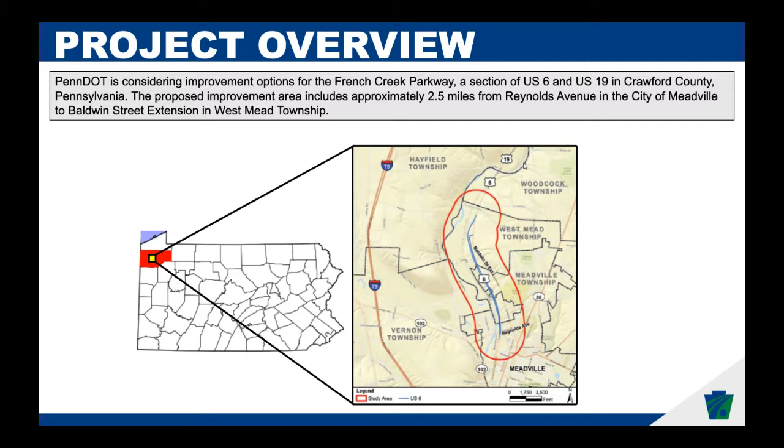Project overview. Most of you are probably familiar with this section of Route 6. It's just north of Meadville. It's where the 4 lanes are. It goes through Meadville and West Mead Township from Reynolds Avenue up to Baldwin Extension. Next slide.

We've had a previous public meeting on this when there was a planning study that was done. These are the concepts that were discussed during that public meeting in 2018: 4-lane reconstruction, reconstruct 2 lanes, and then also concept 3, 2 lanes with a trail, and concept 4 is through lanes with the service road.

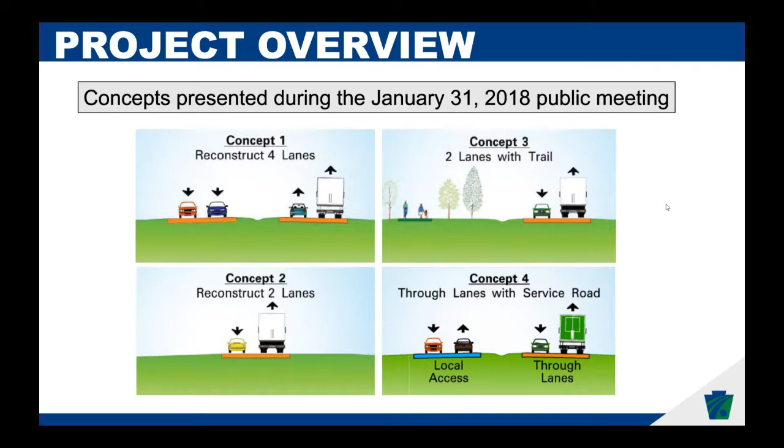It was also mentioned in the previous public meeting about the possibility of doing roundabouts at the two at-grade intersections. There are some additional considerations that have us not looking at roundabouts at this point for those intersections.

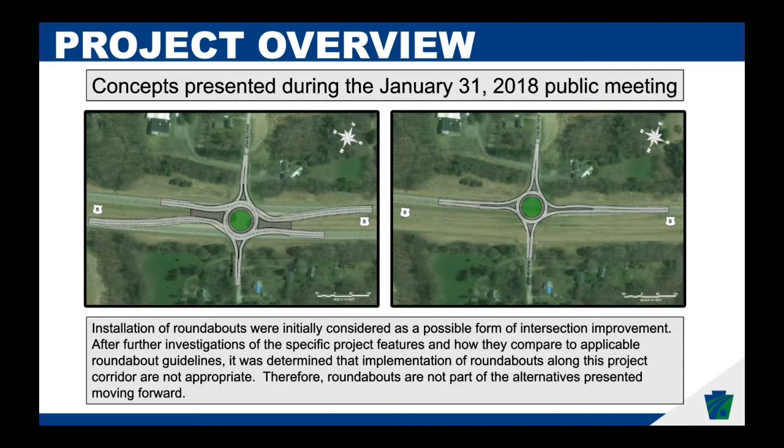Project purpose. Any of you that have driven this section of road are probably familiar with the fact that we are reaching the end of the useful life for this roadway. The pavement has deteriorated. There's some roadway geometry here as well that isn't up to our current standards. We do things a little bit differently now.

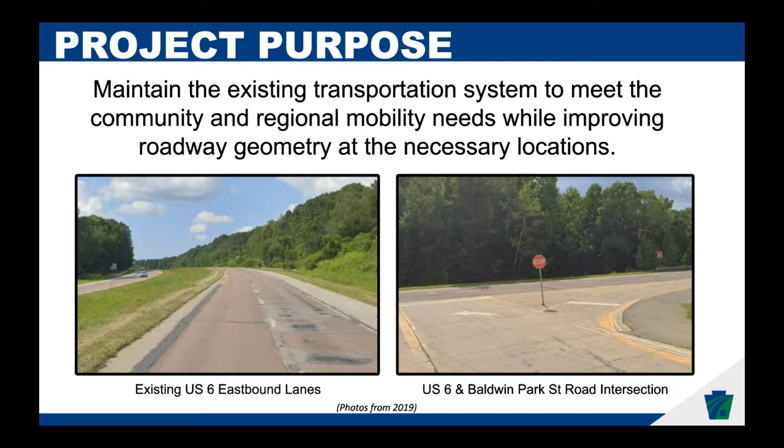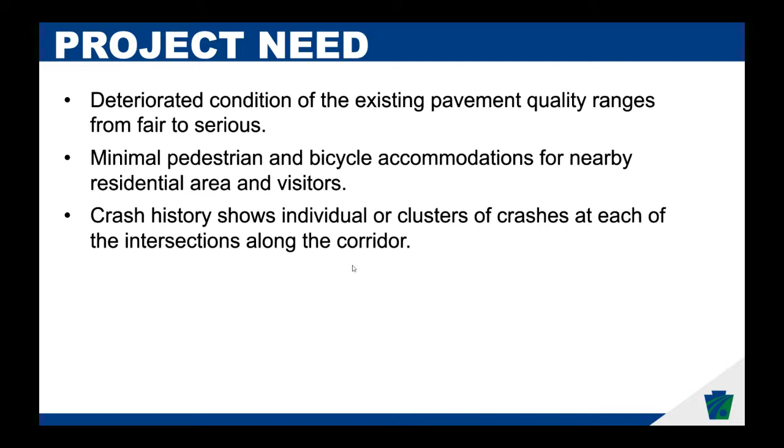This just summarizes: we've got deteriorated conditions of existing pavement, ranging from fair to serious, which we'll go over in a following slide. There's really not much pedestrian and bicycle accommodation through this section. And the crash history through here shows individuals and clusters of crashes at the intersections along the corridor.

All right, this slide goes over the corridor characteristics. There's a lot of information on here. On the top right, you've got the average traffic for each section of the roadway. Just below that, it goes through level of service. Level of service is a little bit like grades you got in school with A, B, C, D, and E, but it's not exactly like that.

Levels of service C, B, and D are really conducive to best use of that roadway. When you have a level of service A, it's great—you've got plenty of roadway. If you see where the cars are, you've got 2 cars and all that extra road, so you actually have more road than you need. It's not a great use of taxpayer dollars to be at level A. Right now we are level A through this corridor, so we have more roadway than we are utilizing with the traffic levels that we have. Our daily traffic through there is 5,700 vehicles, with a truck percentage of 6.3.

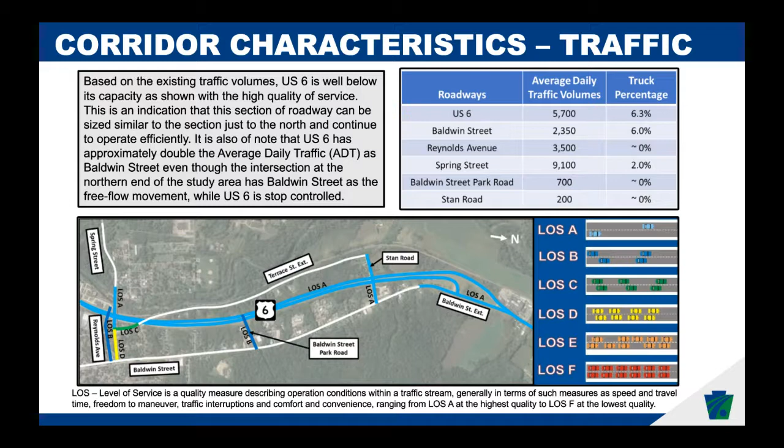All right, this slide shows us what the pavement condition is like, with red being severe or serious condition, up through green being good. So you can see most of the pavement through this area is in serious, poor, or very poor condition, with some areas of fair.

One of the things you need to consider is that a lot of times you can go through and fix areas with a simple repavement. But once the concrete pavement distress levels get higher than 2 to 5%, that really isn't something you can just pave over. At that point, you need a lot of work to get that pavement back, so replacement is a more cost-effective option.

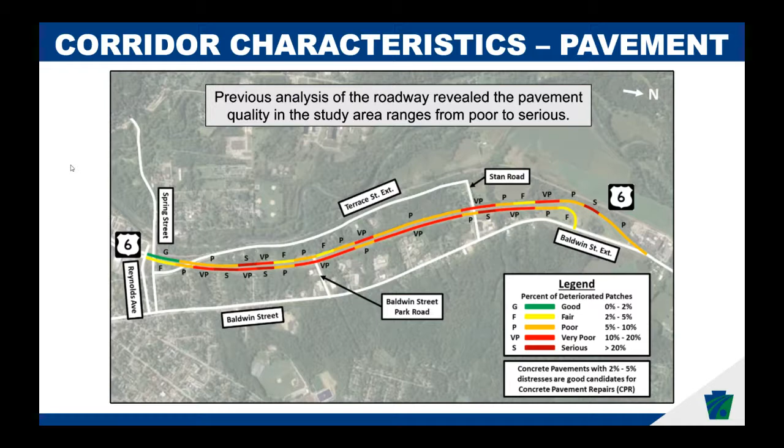There are some structures through there. We've got the Spring Street Bridge, which is our other presentation today, a box culvert that goes underneath Route 6, and also an overpass—Terrace Street goes over Route 6. Both the box culvert and Terrace Street are in fairly good condition, so we're not looking at replacement of them right now. Spring Street, though, only has a remaining lifespan of 8 years, so that's why that project is also being discussed today.

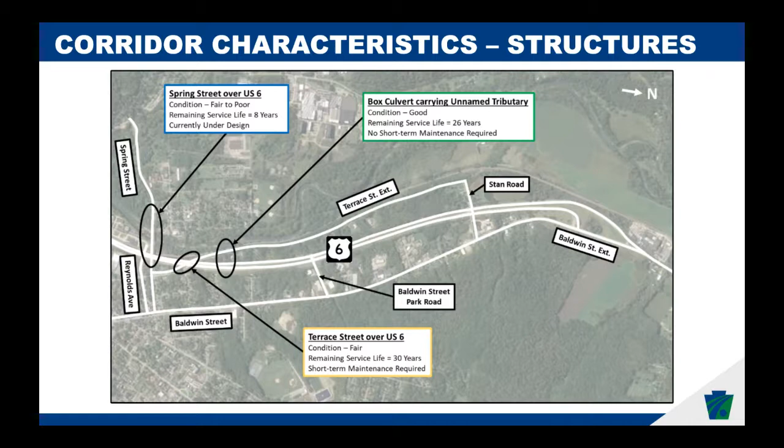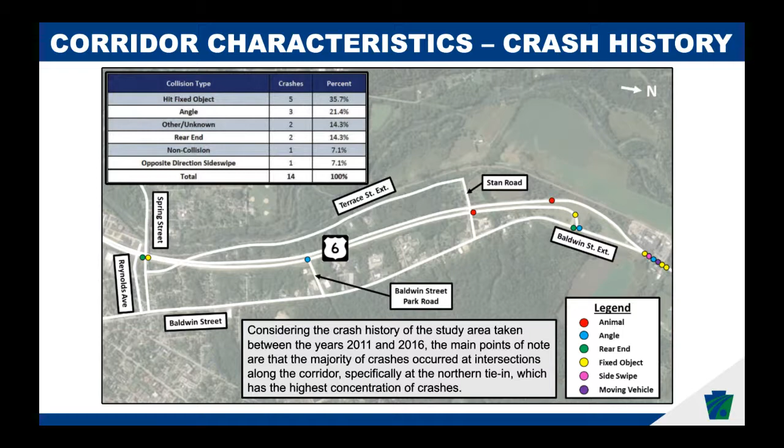All right, proposed alternatives. We've got three potential alternatives to discuss with you today. The first is to replace all 4 lanes, eliminating the wide median at the at-grade intersections. Alternative 2 is to replace 2 lanes using the alignment of the existing US 6 westbound lanes. Alternative 3 uses 2 lanes with a multi-use trail on the US 6 eastbound lanes—same as alternative 2, but instead of just pulling out those other lanes, the pavement would be reused as subbase under a trail.

Some other information we're going to go over is the northern tie-in at the intersection being reconfigured, and the potential for Terrace Street to be done at a future date when that bridge reaches the end of its life, as a separate project.

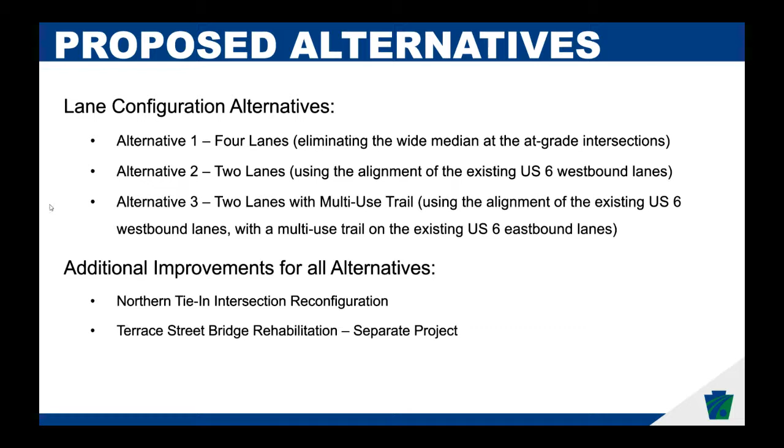Alright, alternative 1, 4 lanes. This is just a quick image of what that would look like—a lot like what it is right now.

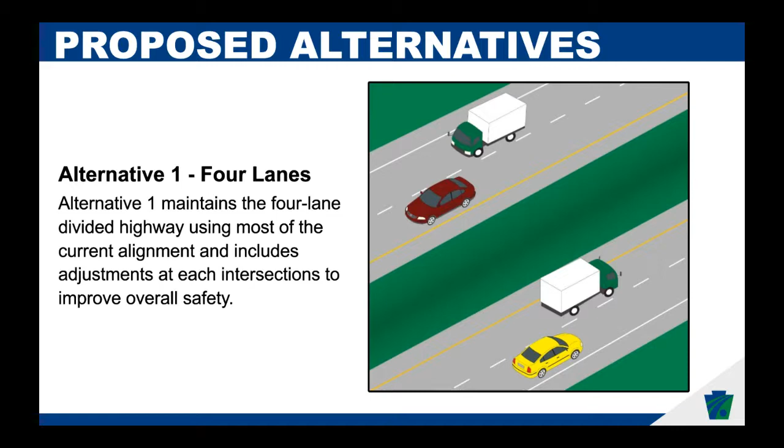The big changes with the 4 lanes will be at those at-grade intersections at Stan Road and Baldwin Street. There would be some additional turning lanes put in there to help assist with the accidents that are happening at those intersections.

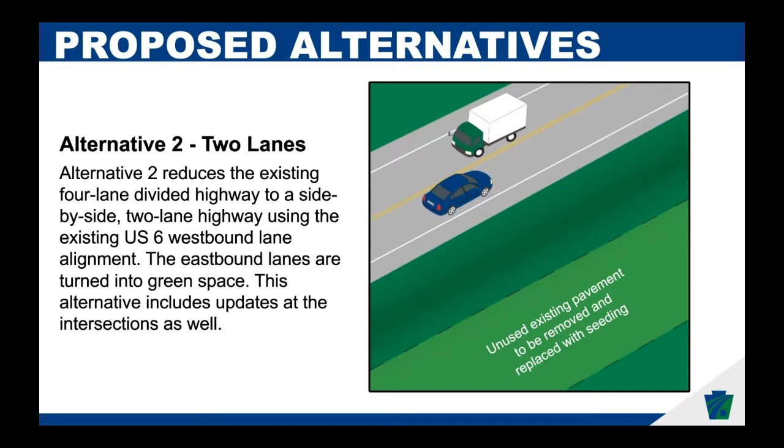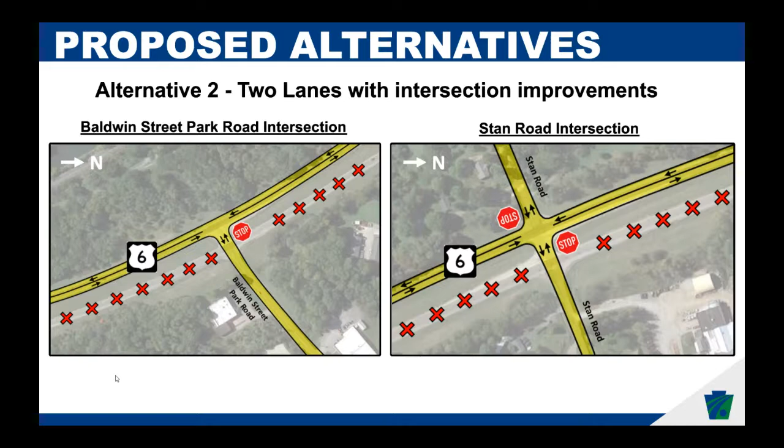Alternative 3 is 2 lanes with a trail. The trail would be a multi-use trail—you'd be able to use it for biking, jogging, walking. It would be separate from the roadway, with a grassy median in between, not a barrier, so it would not be adjacent to the roadway like a wide shoulder.

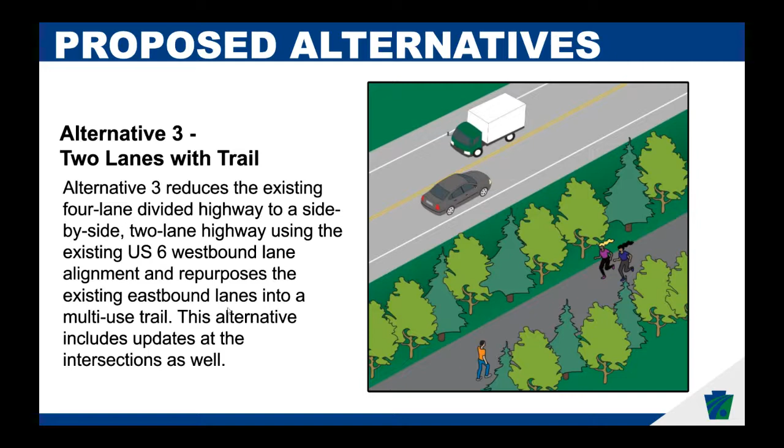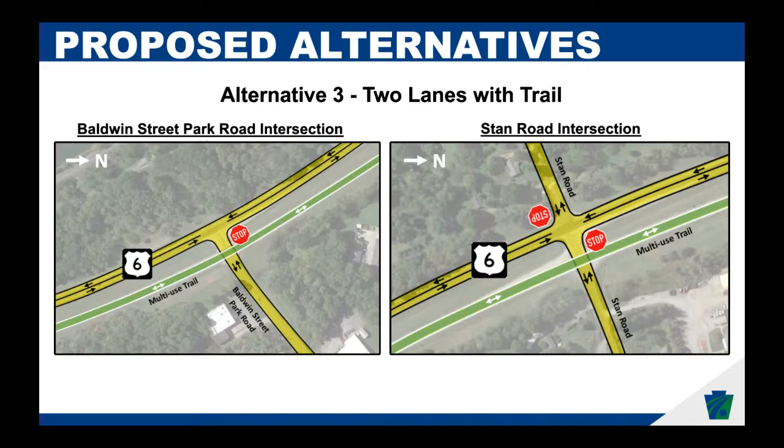Alright, the northern tie-in would be changing. It would be coming in since Baldwin Street—should have pointed this out on the earlier slide. Baldwin Street has a lower ADT than what US 6 does, so it makes sense to bring it in as a perpendicular intersection at this point. So you would be losing that section of roadway that's X'd out there. You'd have 2 lanes, 1 northbound, 1 southbound, and Baldwin Street would come in at a 90-degree angle with stop control.

Proposed alternatives. This is a matrix that we like to do on all of our projects so that it can show where we are with each alternative for the different characteristics that we consider. Maintenance effort: the existing configuration is very high because of the 4 lanes and the median that needs mowed. There's a lot of work there, and to repave and replace that pavement, that's a higher value for maintaining it on a regular basis.

The crash potential there stays medium. Level of service for the roadway is an A. A is good—sometimes A is a little too good. It means that we're not actually utilizing all of the roadway for the amount of traffic we have. And the reconstruction cost is $9,100,000. Alternative 1, 4 lanes.

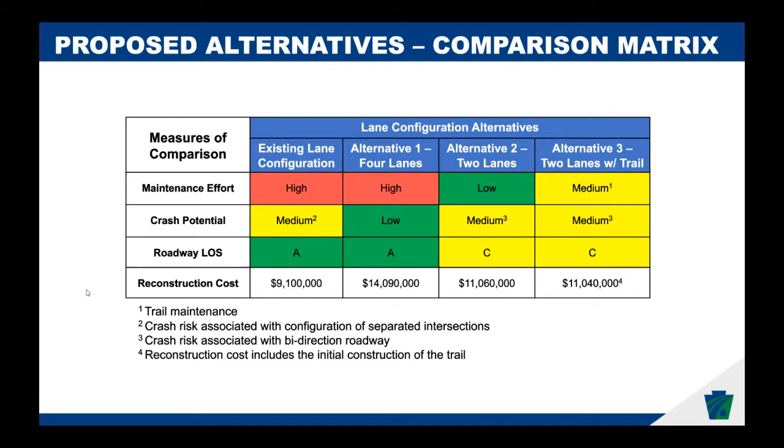Alright, Terrace Street. Terrace Street is not proposed as part of this project. It is something that we are considering how it will be done in the future under this project, just in case—we didn't want to build something and then have it not work with Terrace Street in the future. There is a chance we might do a little bit of rehab on the bridge under this if it needs it at the time. Those costs aren't included in the previous slide for the matrix.

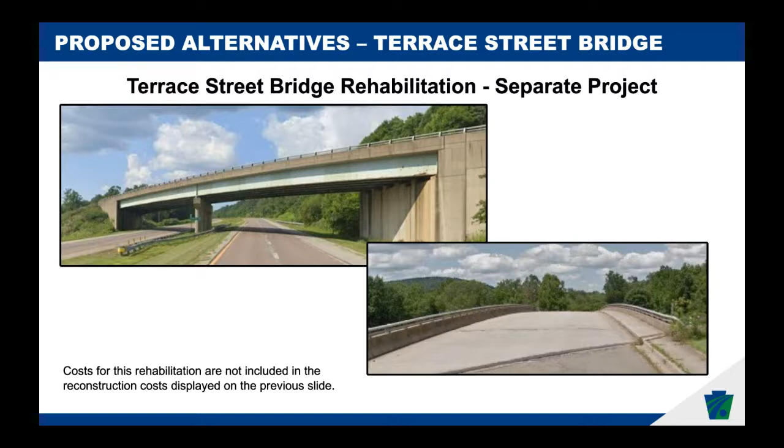Next slide. Alright.

Traffic control during construction. In the existing configuration, you've got westbound and eastbound lanes. During phase 1 of reconstruction, traffic would be moved over so that it was on the eastbound lane, and work would be done on the westbound lane.

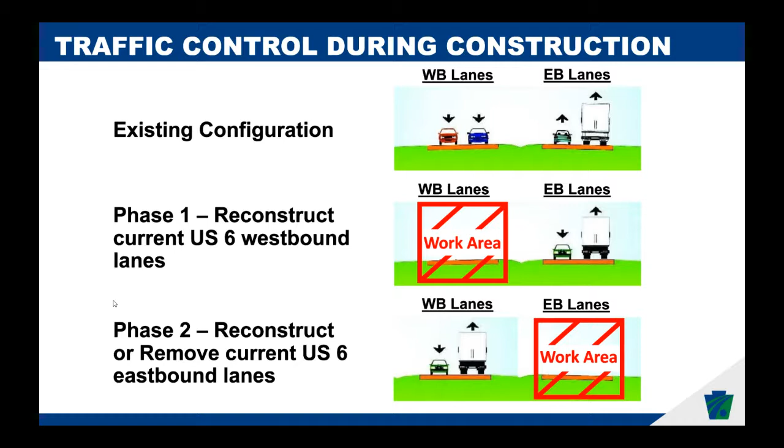During phase 2, work would be done on the westbound lanes, so both traffic moving eastbound and westbound would be moved over there. Then work would commence in the eastbound lanes, either removing that pavement and putting in a trail, or just removing that pavement as well as the subbase.

Our steps moving forward: we've got public feedback, which is where we are right now. Once we get feedback from the public, we move into alternative selection. From that, we'll know whether we're doing alternative 1, 2, or 3. We'll share that information with the public and move on with preliminary design and final design, with construction starting in 2022.

One of the things I mentioned earlier is this project has a unique opportunity for pollinator habitat. As many of you have probably heard, bees are having a difficult time right now, as are monarch butterflies and other pollinators native to our area. Because this project already has a lot of right-of-way in the area, we have the opportunity to put in some naturalized gardens, or even more refined gardens, somewhere along this corridor if there are people interested in upkeeping them.

There will be information on our website if any groups are interested in participating. This is a great opportunity for any garden groups in the area, possibly Boy Scouts or other groups. Anyone interested can contact me or look at the presentation on the website. It could be a large area towards the north end of the project, where we currently have the realignment of Baldwin Street going on, or even smaller garden areas along the corridor itself.

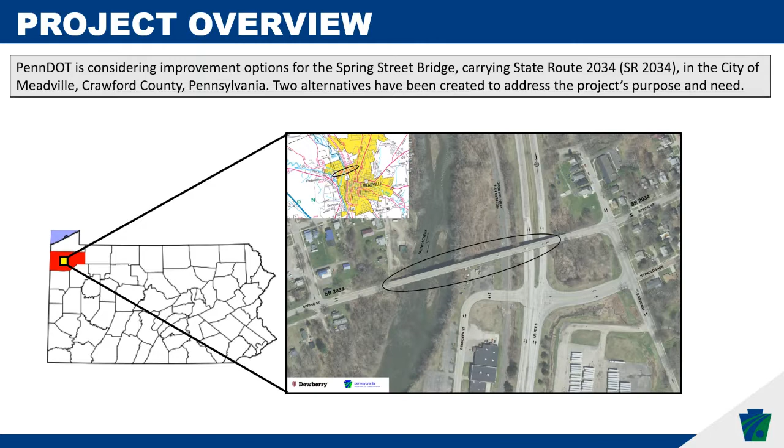So two alternatives have been developed through the study phase to address the purpose and need of the project. And the project purpose is essentially twofold. First is to restore a structurally sound and cost-effective Spring Street crossing of French Creek and an efficient crossing of the New York, or the Western New York and Penn Railroad. And then the second aspect of that is to maintain connection with Route 6 and other roadways in Meadville. Each of these alternatives has a different approach to meeting that project purpose.

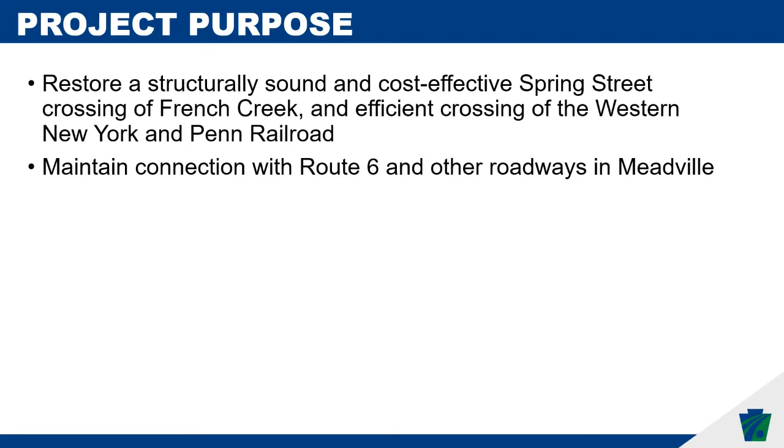The need for the project is primarily these three items shown here. The first is poor condition due to aging and deterioration of the reinforced concrete and steel bridge components. Steel and concrete bridges typically can last a long time, but once they begin to deteriorate, that deterioration is increasingly progressive, and really that leads to costly maintenance needs. And then the third item listed here is what we would consider to be the only real geometric deficiency of the bridge, and that's the narrow bridge shoulders.

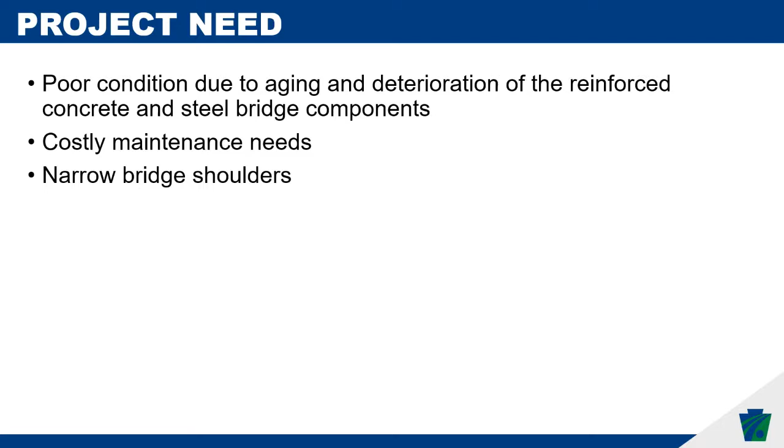Okay, so the existing Spring Street Bridge has 12 spans. As I mentioned, it crosses French Creek, Route 6, the French Creek Parkway, and the Western New York and Penn Railroad. The traffic volume across the bridge is on average over 5,000 vehicles per day. You can see a photo here that shows a view of one of the existing bridge piers looking east, and this is looking across the railroad tracks toward French Creek Parkway.

So on the underside of the bridge, you can see some dark areas and some white areas, which indicate deposits of calcium, caused by road salts that leak into the concrete and corrode the steel inside. So the beams of this bridge are actually steel beams encased in concrete for protection. That's an older type of construction that we don't see anymore. We don't use that because it's difficult to maintain with that concrete cover, so you can't just go and repaint the steel. Again, that's where those costly maintenance needs are coming from.

And you can see the condition of this pier is actually not bad. Some of the piers have more deterioration than what you see on this one. That's really where there are areas where water is leaking through deck joints in the bridge and causing more deterioration at some of those pier locations.

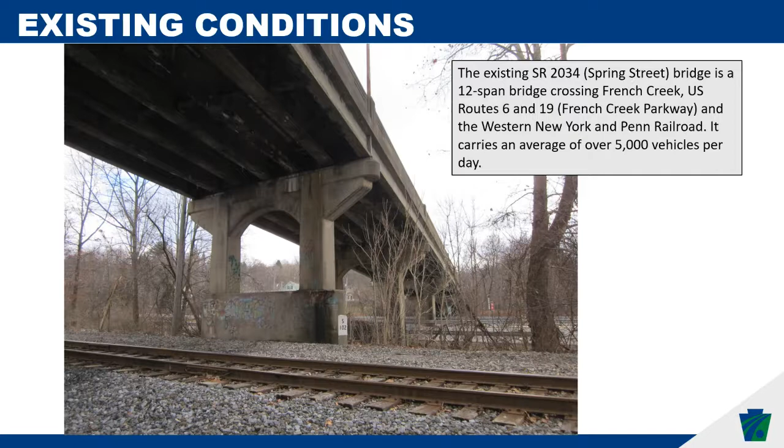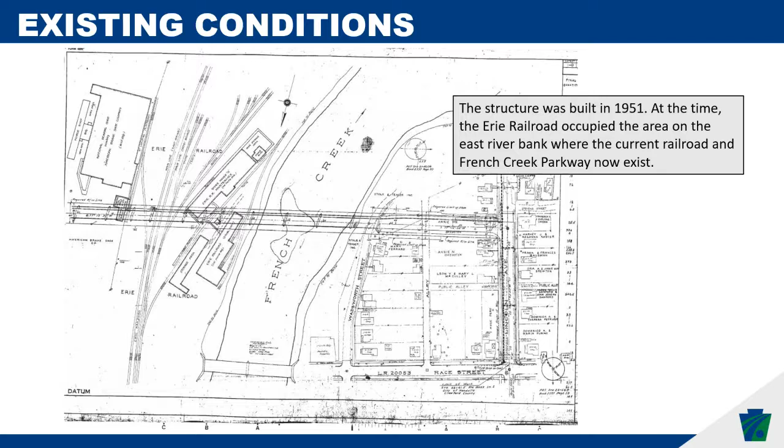The bridge carries a significant amount of traffic, and is also used by pedestrians and bicyclists. One unusual aspect is the stairway on the east bank connecting the bridge down to Bessemer Street. This stairway structure doesn't meet what is currently required by the Americans with Disabilities Act, or ADA, for accessibility. That means the ADA criteria would call for a ramp-type structure accessible by wheelchairs.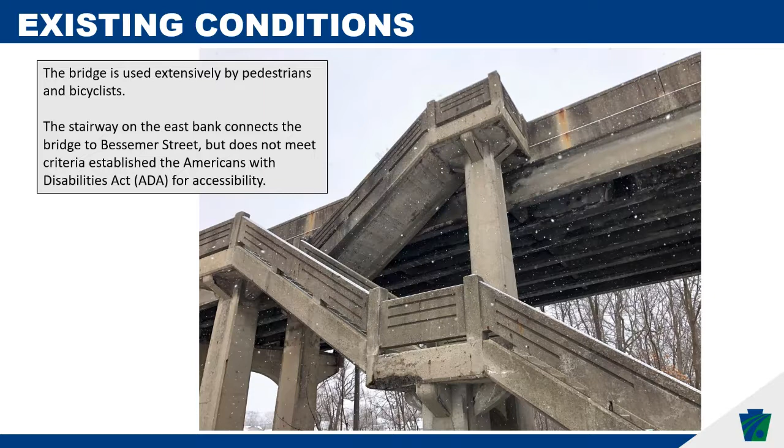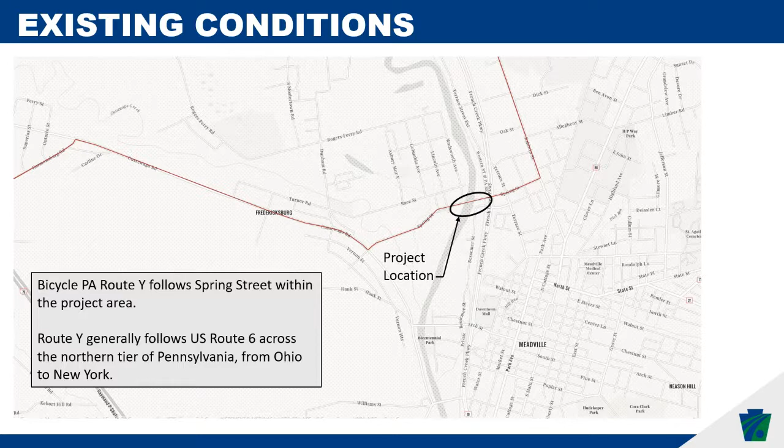Here you can see a map of bicycle route Y shown with the brown line across the map, and the project location where the bicycle route crosses uses Spring Street to cross through the project location. This designated bicycle route generally follows US Route 6 across the entire northern tier of Pennsylvania from Ohio to New York.

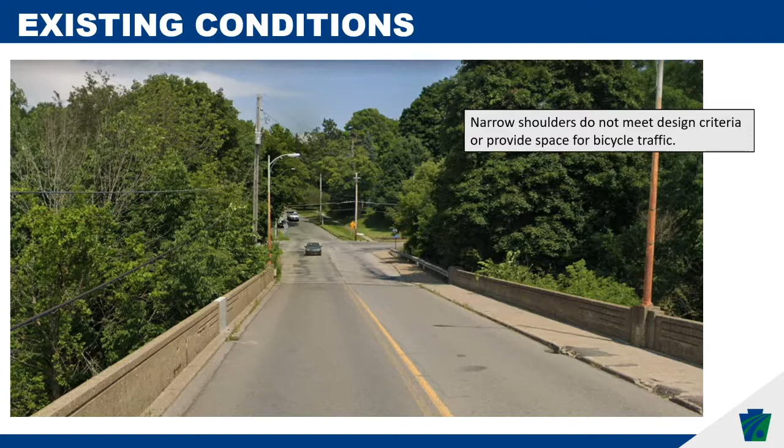This photo, looking east across the bridge, shows the narrow existing shoulders on the bridge deck, which really don't provide what's needed for bicycle traffic. There's a sidewalk that accommodates pedestrians, but sidewalks aren't designed or considered to carry bicycle traffic.

Construction of this new bridge could be done while traffic is maintained along the existing bridge. That's one aspect of this project to contrast with alternative 2. Another aspect is that with this alternative, Spring Street crosses the railroad at the existing Bessemer Street grade crossing rather than on the existing overpass. That's another important difference between these two alternatives.

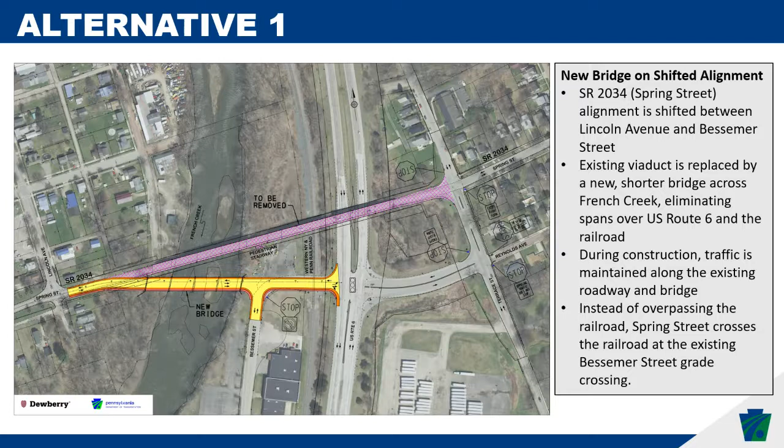Along with that, alternative 1 has some fairly significant changes to traffic patterns. We can see the intersection of realigned Spring Street with Bessemer Street, forming a T intersection with stop sign control for Bessemer Street. With this alternative, we'd likely need to prohibit left turns from Bessemer Street onto the new realigned Spring Street Bridge, because of traffic and safety concerns related to the volume of traffic and the signalized intersection with Route 6 just to the east, and the fact that traffic would be traveling west along Spring Street, coming from different directions at that intersection.

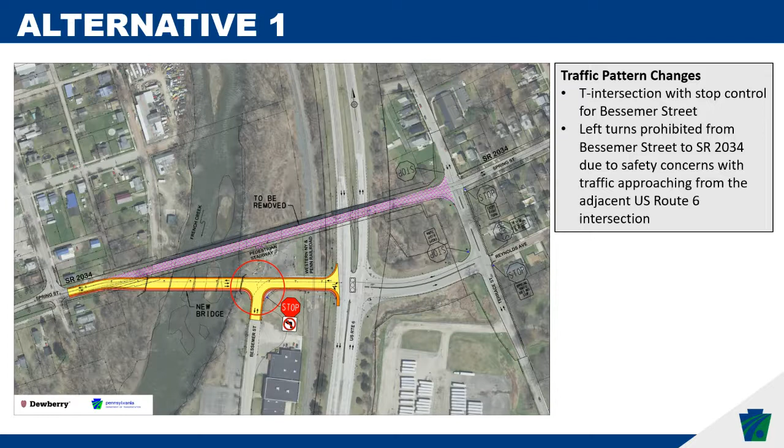Now let's look more at traffic pattern changes at the next three intersections. First, we have realigned Spring Street and US Route 6. The existing intersection is signalized, and we'd have that same condition with alternative 1, with the difference that there's a lot more traffic volume from Spring Street moving through the intersection. If we go beyond the study phase we're in right now, we need to look more closely at the signal retiming and the best way to implement this signalization. For example, we want to make sure the railroad crossing gates are coordinated with the signal.

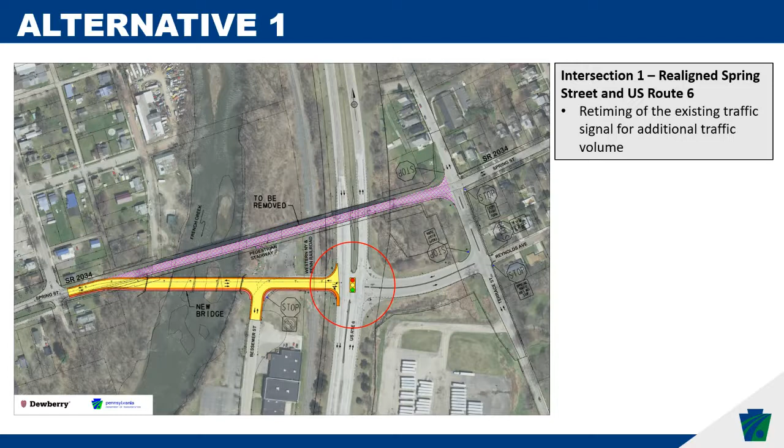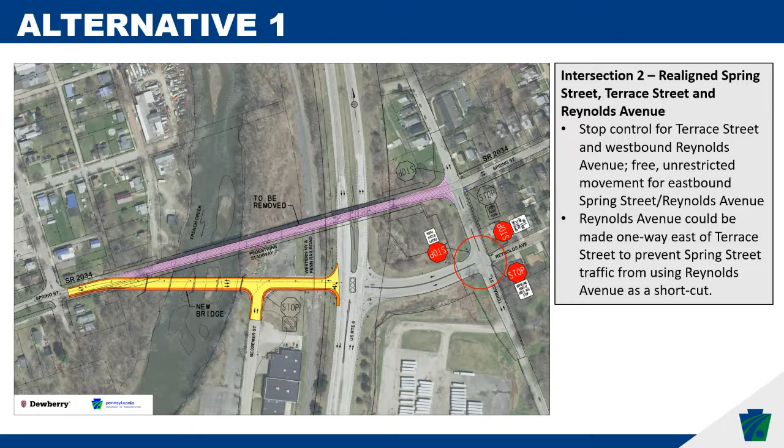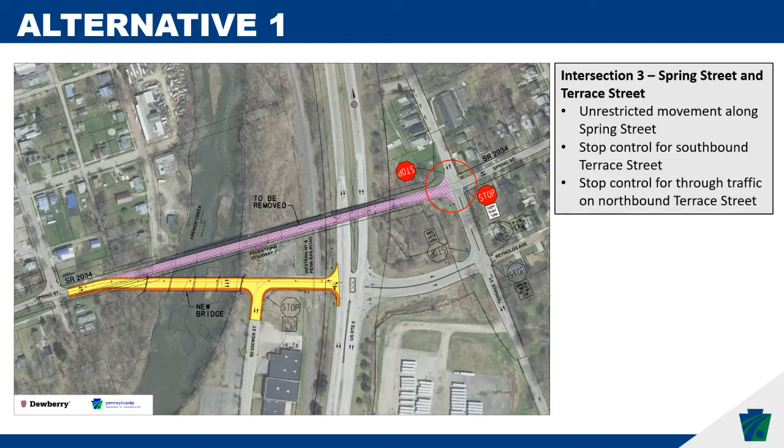Moving to the next intersection, this is where realigned Spring Street would meet up with Terrace Street and Reynolds Avenue. Stop signs control all directions except the Spring Street through movement, which would basically be heading east toward the intersection and then turning north. So Spring Street would have the right of way and the priority movement, with other directions having stop sign control. Finally, at the third intersection, a similar situation applies, where we want to maintain the unrestricted movement along Spring Street so that traffic can flow more or less continuously, with stop control for the other directions.

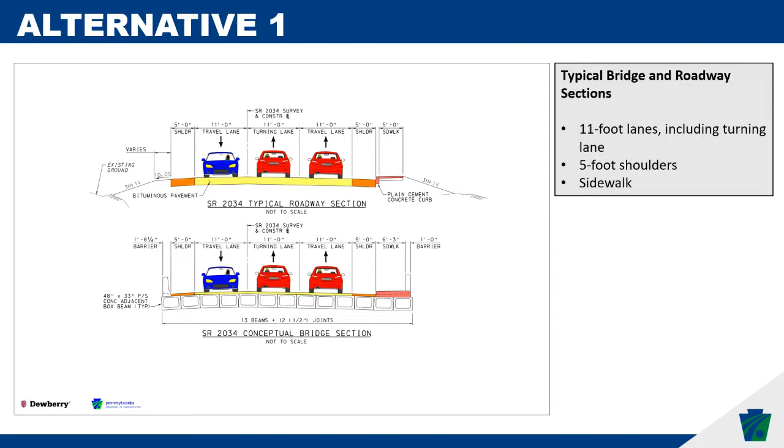This diagram shows we have 11-foot travel lanes, 5-foot shoulders, and a sidewalk on the right side, which would be the south side of the road, along existing Spring Street. The eastbound direction, shown by the red cars, has 2 traffic lanes, because this direction is approaching the signalized intersection with US Route 6. Then we have one direction westbound, shown by the blue car.

Another important aspect of alternative 1 to consider is effects on the floodplain. This is a map showing the floodplain of French Creek, actually a combined floodplain of French Creek and Cussewago Creek. The shaded areas are the areas within the floodplain that are inundated by the larger flood flows that are established by the flood insurance mapping that FEMA produces.

For alternative 1, changing the location of the bridge and changing the configuration to a shorter span that crosses French Creek at a lower elevation — those are important changes that would need to be looked at in detail to make sure that alternative 1 would not result in increased flood risk within the floodplain.

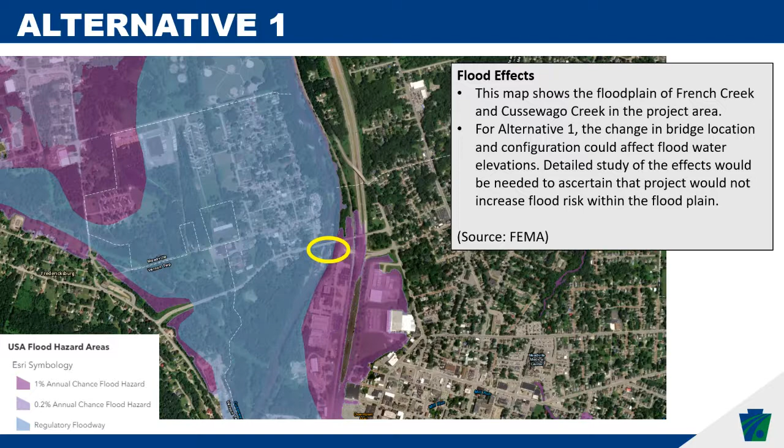If we move now to alternative 2, you can see what that looks like in this plan view. What's shown in yellow is basically replacement or restoration of the existing bridge at its existing location. Restoration would likely mean replacement of the upper part of the bridge, the deck and beams. The piers, like we saw in the photo earlier, could be repaired or partially replaced based on a further study of their condition. So some piers could be eliminated, some could be reconstructed.

With this alternative, again, we're widening the shoulders out to 5 feet. With alternative 2, we have no changes to the existing traffic patterns. And you can see what's shown in red is a possible replacement of the existing stairway with a ramp type structure.

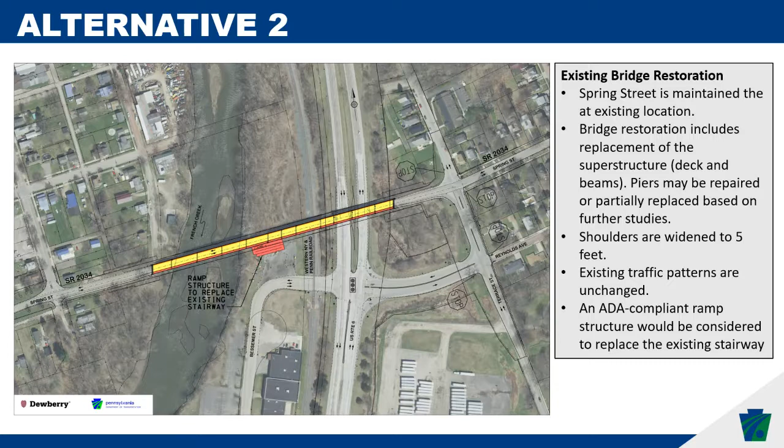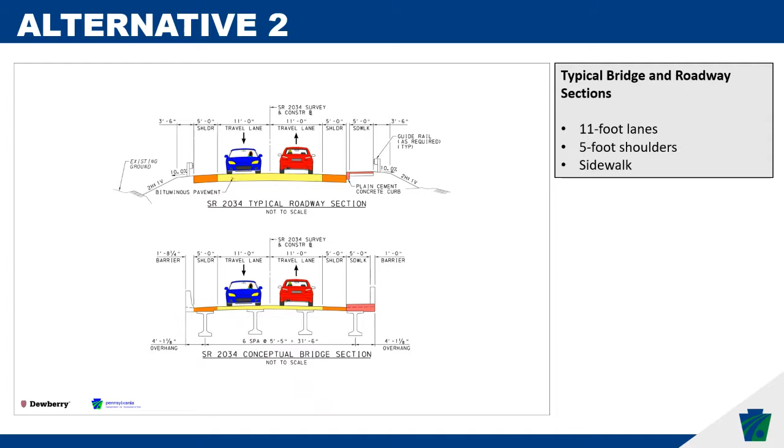A similar diagram for alternative 2 also shows 11-foot lanes, 5-foot shoulders, and sidewalk at a similar location. The main difference here is only 1 lane for eastbound traffic rather than 2.

I mentioned that alternative 1 could be constructed — the new bridge could be built while traffic is maintained along the existing bridge during construction. That's really not possible for alternative 2, so we'd have to close the bridge completely during construction. A potential detour route shown here has a length of about 4.2 miles, and our early estimates for the duration of the detour is roughly 12 to 14 months.

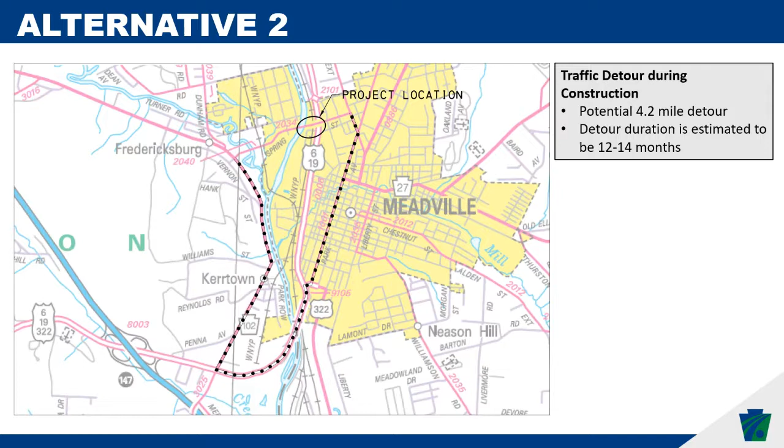Again, if we look at that floodplain map, the thing to note about alternative 2 is that we're not changing the location or the basic configuration of the bridge, so we don't have any real possibility of increased flood risk with this alternative.

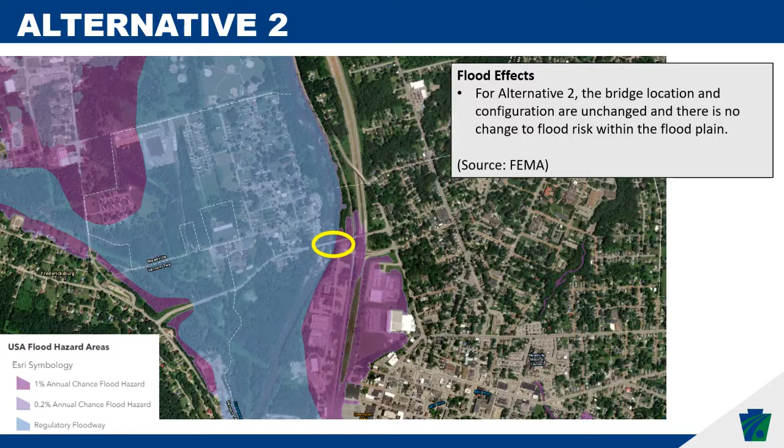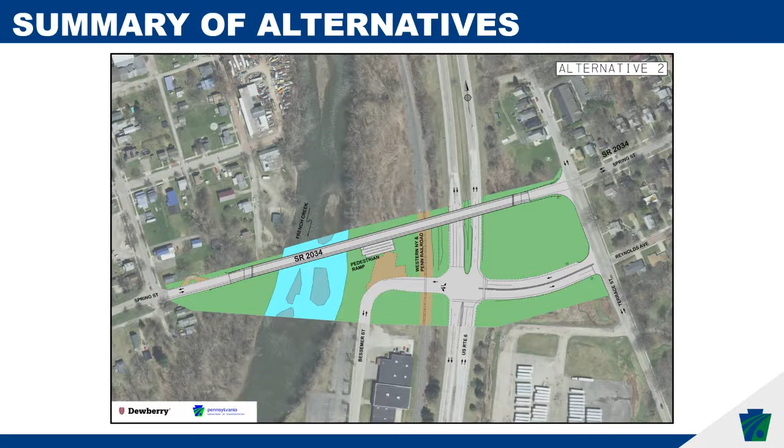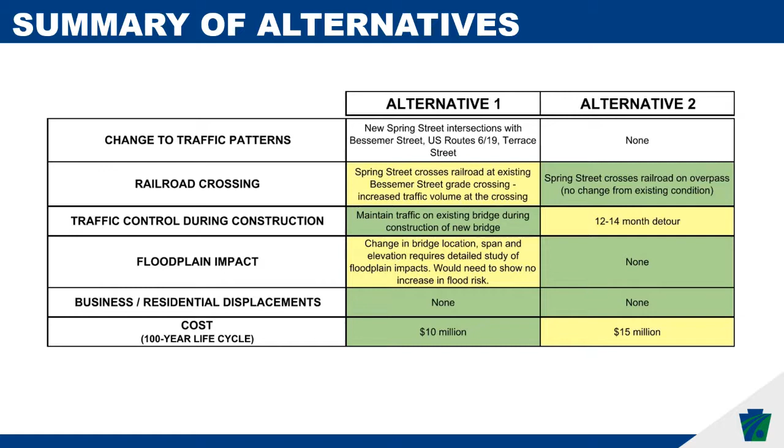The steps moving forward on this project: we have public feedback through this meeting tonight, and then the next step will be alternative selection. At that point there'll be some notification, possibly another public meeting or some form of notifying what the selected alternative is for the project.